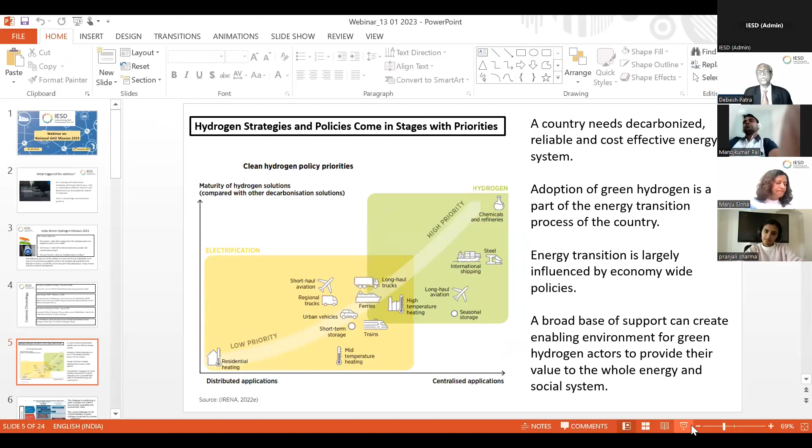Now, if we have to understand this mission, before that, let us understand some of the theoretical structure of this mission. First thing, a country needs a decarbonized, reliable, and cost-effective energy system. Now, adoption of green hydrogen is a part of the energy transition process of the country. And energy transition is largely influenced by economy-wide policies.

A broad base of support can create an enabling environment for green hydrogen actors to provide their value to the whole energy and social system. So in this transition process of green energy, there are areas of low priority, there are areas of high priority, and the square that comes on the right hand side on the top of this graph is all the areas of high priority, and that is addressed by hydrogen. And the sectors which are top priorities are the industries, chemicals and refineries, then steel, then international shipping, then long-haul aviation, and then comes long-haul trucks and high-temperature heating.

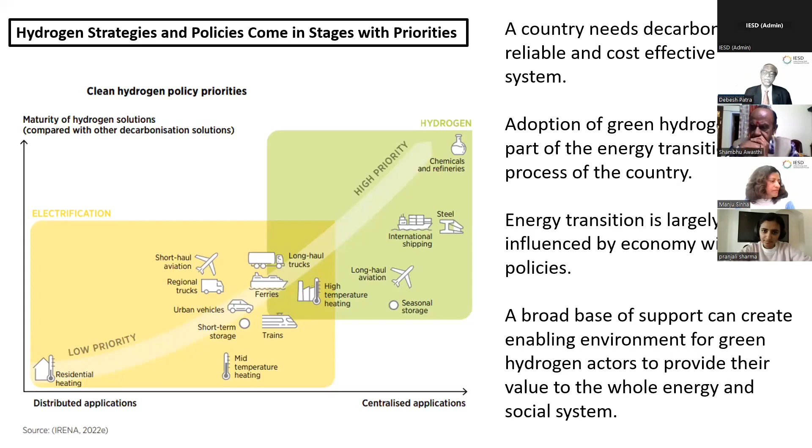Now, everything that we talk of energy, particularly the energy transition leading up to the adoption of hydrogen, is contingent upon some innovations. Innovation has to take place in the space of technology and then get translated into infrastructure. Innovation has to be there in market design and regulation. Innovation has to be there in system planning and operation. And innovation has to be there in business model. For example, in the space of technology innovation, there comes electrolyzer technology, hydrogen storage, digitalization for renewables, and hydrogen production forecast.

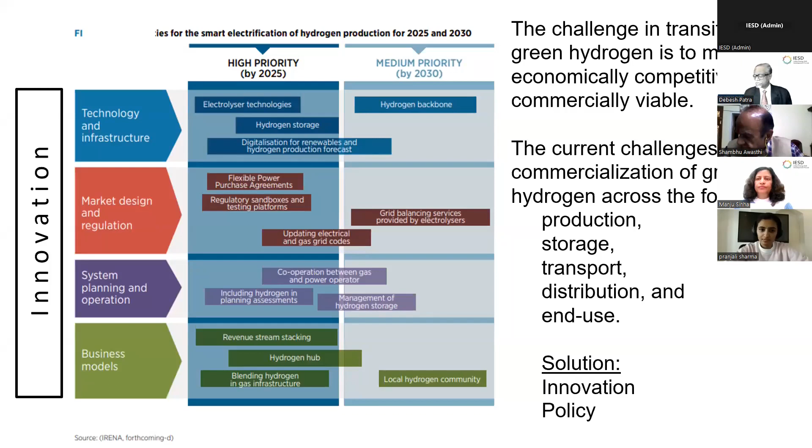And so on. Coming to market design, we have to have a flexible power purchase agreement, regulatory sandboxes and testing platforms, and then updating electrical and gas grid codes. And like that, it goes on. There are many areas where this innovation has to work. So the challenges are there across the value chain of hydrogen, that is production, storage, transport, distribution, and end-use application. And the solutions are primarily two. One is innovation, second is policy.

And so far, what has happened in India is that it is a part of the bigger energy transition picture. And the shift to hydrogen has to take place as a support to India's energy security. India is in the league of 30 countries in the world where hydrogen strategies have been outlined. And India has declared its ambition to become an exporter of hydrogen to countries like Japan, South Korea, and Europe. So overall, a competitive value space has been created in the manufacturing and commercial area for hydrogen, in which corporates, R&D setups, and foreign collaborations are vying with each other to step in.

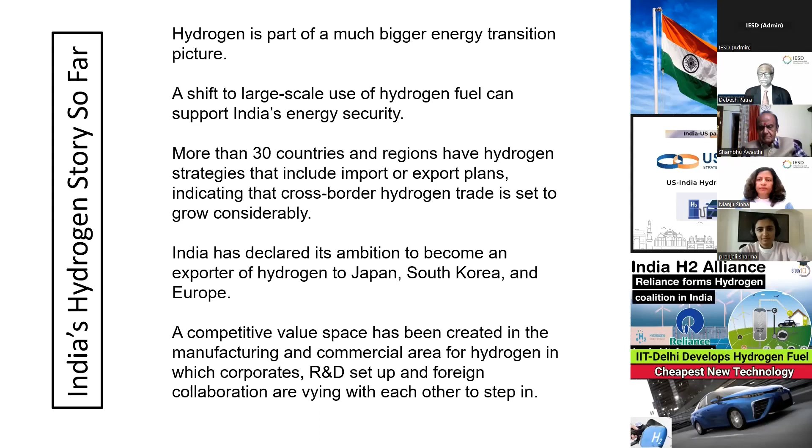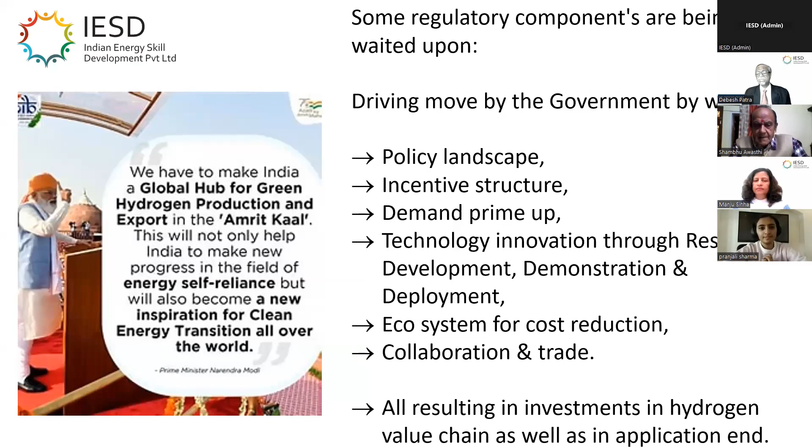But with this kind of status, as we find in India, certain things are being waited upon. For example, a policy landscape is being expected. An incentive structure is being expected. Demand priming by the government is being waited upon. Technology innovation through research, development, demonstration, and deployment, that the country is waiting for. And an ecosystem for cost reduction, the country is waiting for. And then the collaboration and the trade. So all these resulting in investments in the hydrogen value chain, as well as in application, this the country was waiting for. And when the country was waiting for all these, then came the National Green Hydrogen Mission 2023.

Then some pilot projects, particularly in the hard to abate industries like refining, steel, cement, shipping, and production pathways. There have been budgets of 1,466 crores. And then R&D will be done under the Strategic Hydrogen Innovation Partnership with a PPP model, and 400 crores have been allotted. And then some miscellaneous other components, 388. 19,744 crores of rupees have been allotted under this mission by the cabinet decision. Now, MNRE will formulate detailed guidelines for implementation of the respective components.

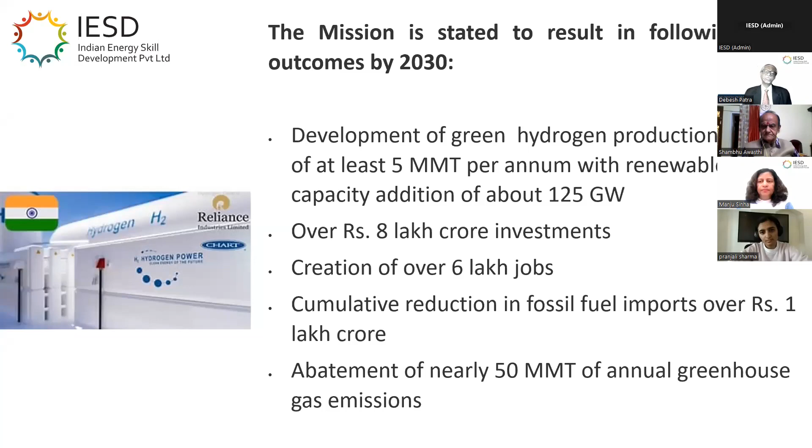And what is expected out of this mission is that 5 million metric ton of green hydrogen will be produced in association with the renewable energy capacity of 125 gigawatt. And then, as I said, 8 lakh crore rupees investment is likely to happen. 6 lakh jobs are likely to be created, and so much of fossil fuel import will be reduced, and so much of greenhouse gas emission will be reduced.

Now, some backup working also has been given, that this 5 million ton green hydrogen production would require 32 gigawatt of electrolyzer capacity, which will consume 115 million liter per day of water. And similarly, this also is contingent upon 90 gigawatt of solar, 38 gigawatt of wind power, and that will use 340,000 hectares of land. And then carbon dioxide emission reduction, and all the backup calculation.

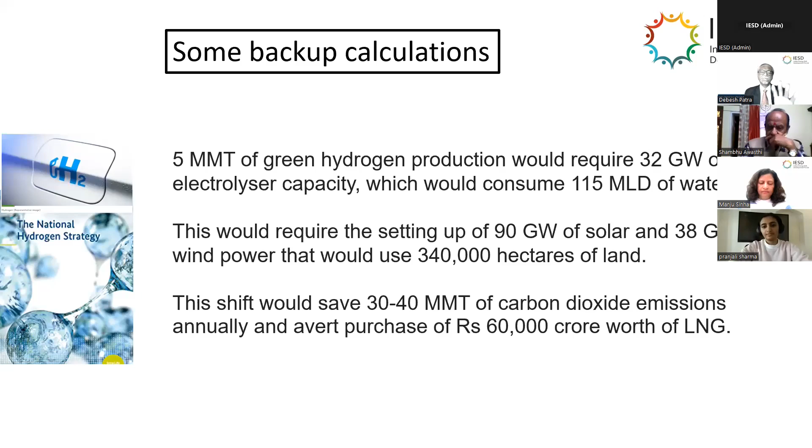Now, what is the way forward? Way forward is that an enabling policy environment framework will be developed to sustain the establishment of green hydrogen ecosystem. A robust standards and regulation framework will also be developed. A public-private partnership framework for strategic hydrogen innovation partnership will be facilitated under the mission. R&D projects will be goal-oriented, time-bound, and suitably scaled up to develop globally competitive technologies.

A coordinated skill development program will also be undertaken under the mission, and mandatory green hydrogen consumption would perhaps be set for fertilizer units, petroleum refineries, and city gas distribution network. Now, the significance of these things is that the future outcome of this mission relies a lot on crafting of these details and guiding the ecosystem as it unfolds.

And all ministries, departments, state governments, etc. will coordinate under the overall nodal agency, that is Ministry of New and Renewable Energy, MNRE. And there is a governance structure which is there in the part of the report.

Now, specific actions that are likely to follow: in the next 3 to 4 months, government may invite competitive bids for subsidies, and bids will be invited for setting up of 2 green hydrogen manufacturing and utilization hubs, that is fertilizer and steel plants, and factories for making electrolyzers.

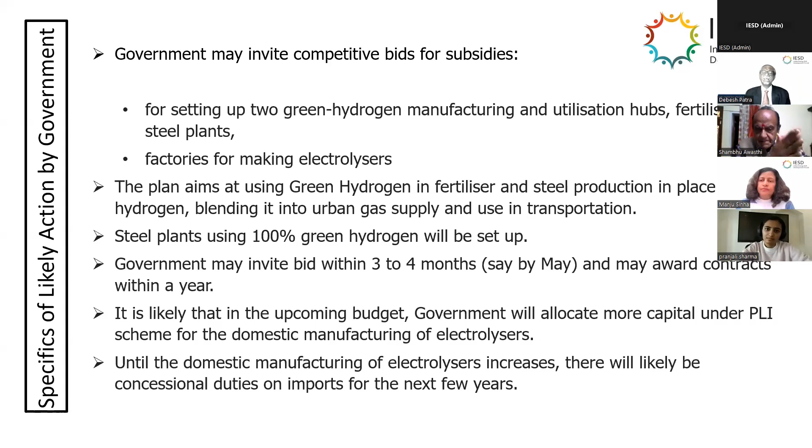It is likely that in the upcoming budget, government will allocate more capital under PLI scheme for domestic manufacturing of electrolyzers. And until electrolyzers are produced in large scale, there may be concessional duties on import for the next few years, and there could be a total waiver of duty on electrolyzers.

Yeah. Good afternoon to everyone. Sources and mechanism of hydrogen production, renewables, water, and application of fuel cells. These are the topics that I will cover in my speech. Next.

You know, there was a global investors meet at Indore on 11th. It was inaugurated by our Prime Minister. He especially mentioned and emphasized investment in green hydrogen. Next. This shows the importance, and as Dr. Patra has already presented, there is tremendous scope in all the fields, whether it is consultancy or skill development or some sort of training or awareness program and operation, maintenance, installation, whatever you think of, there is a tremendous scope.

Now, before going further, there are some points I would like to caution: hydrogen is well established as far as the industries are concerned, but now it is going in the public domain. So awareness is of great importance. Then leakage is a critical issue because it is colorless, odorless. So you cannot see, you cannot realize that it is leaking. So that is a challenge. It is the lightest, so it moves up. This is a plus point. It moves up in the atmosphere. So if it is an enclosed system, we may put some sort of detector at the top to detect it.

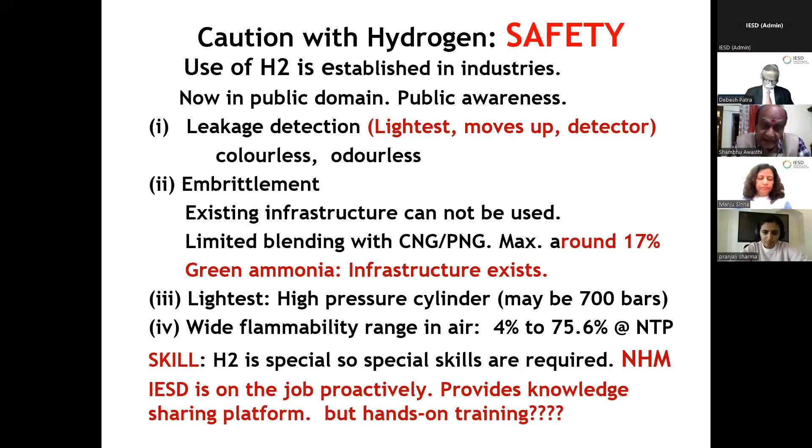And till infrastructure gets developed for hydrogen, there is an option that we may take the route of green ammonia. Green ammonia is important. It is part of the policy also, which was issued in February.

Now I come to sources. We are all aware of these sources: fossil fuel, coal, crude oil, renewables, biomass, and of course nuclear. These are the main. Next. This production mechanism, I have just listed here, but better we go to the next slide. From there I will start explaining.

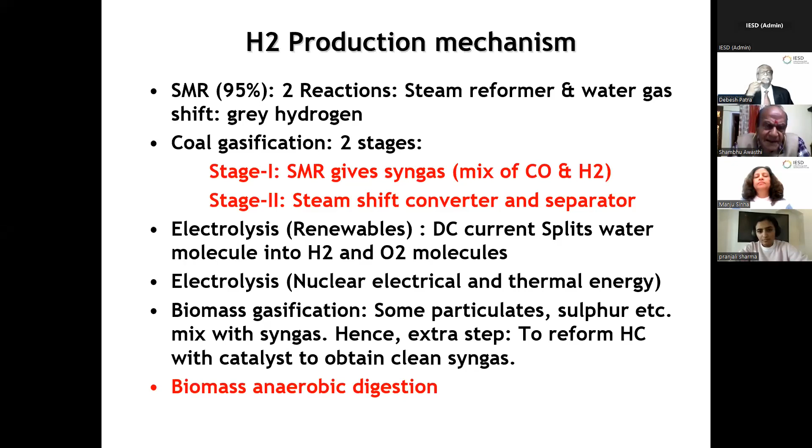So next, please. Yes. Now, steam methane reformation process: almost 95 or even 96% globally follow it. This is the method of producing at present. It is in two stages. First stage is the reformer reaction. Here, methane, CH4, and water, generally in the form of steam, go in and produce a syngas. Syngas is a mixture of carbon monoxide, CO, and hydrogen.

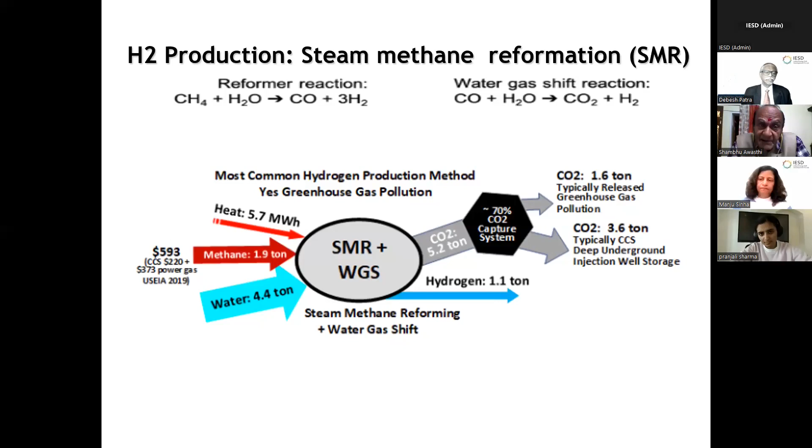And in the next stage, we have to segregate them. So again, there is CO. We again induct some steam, water, so that CO is converted into CO2, and hydrogen is segregated out. This is the most commonly adopted everywhere throughout the world. Next. This coal gas, no, previous.

Coal gasification. In coal gasification, pulverized coal is used, which reacts with an oxidant, maybe oxygen or some steam. And coal is converted into a very hot syngas. Syngas is again a mixture of mainly CO and hydrogen and CO2 and something else also. So again, the same process goes on, and syngas goes through the shift converter reactor. It has to be purified, and all impurities are to be removed.

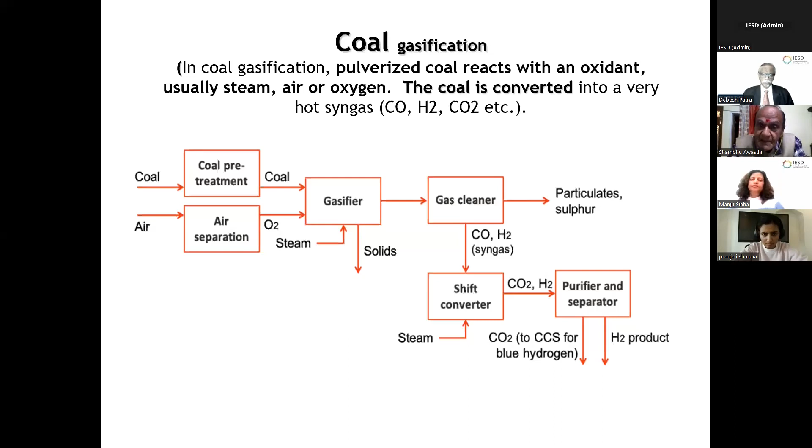And if we make the provision of carbon capture also, then the hydrogen that we get is designated as blue hydrogen. Next. Biomass. We know biomass, what these are. So next, I will explain.

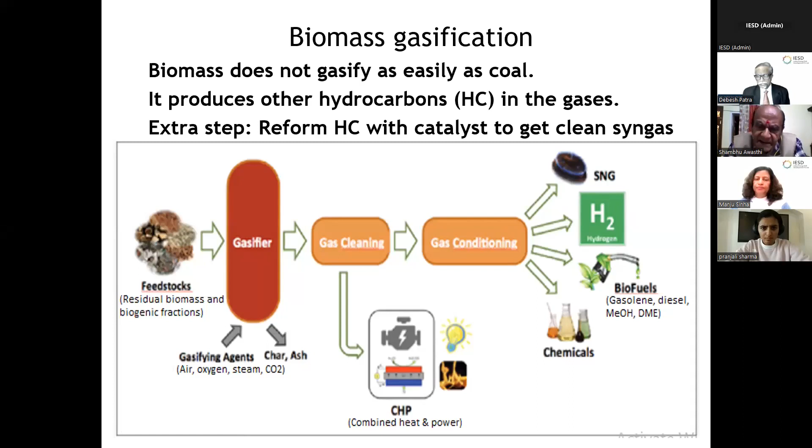Biomass gasification. Gasification method, we have just discussed coal gasification. It is similar, but when we get the syngas, it contains a lot of hydrocarbon gases, impurities, and some particulate matter also. So there is one additional step as far as biomass gasification is concerned. The extra step is that we reform hydrocarbons with a catalyst to get clean syngas. And once syngas is available, then naturally CO2 has to be segregated or removed, and hydrogen we can get. That's all. This is the process. Next.

At the same time, it can be used for soil conditioning also. This biomass is very important in the Indian context, because the Indian economy is dominated by the agriculture sector. Okay, next please.

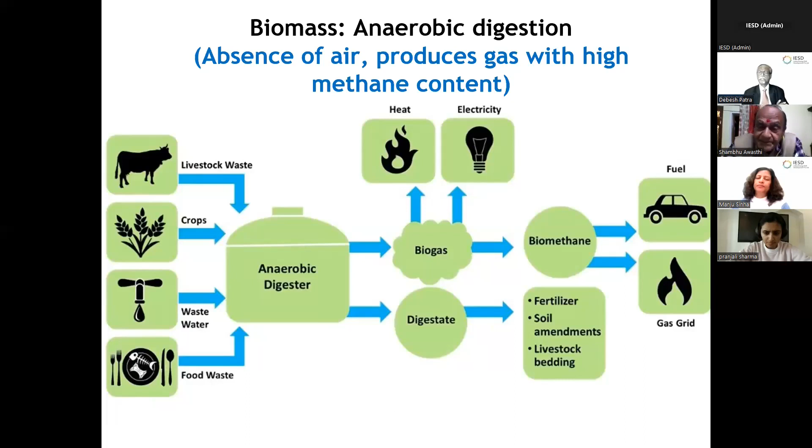I would like to mention the main problem with biogas, biomass waste conversions and all that. These processes are very slow. We need large-scale production of hydrogen and green hydrogen, in huge quantity and at a fast rate. So a lot of research is going on in various institutions.

But I would like to mention that in the USA, they have used organic waste and a closed-loop, carbon-negative pyrolysis process. And they've already demonstrated this project by operating it for 1 year. It is in California. So this is an encouraging development. And they claim it is very, very pure hydrogen they are getting from it. Anyway, next.

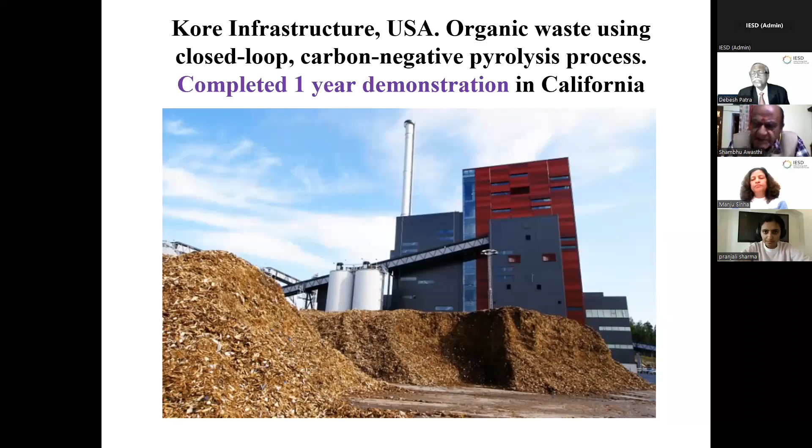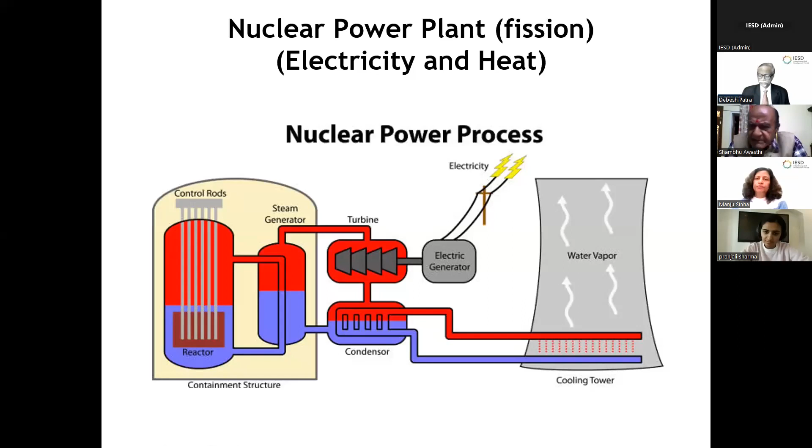Nuclear plant, we know. Along with thermal, they basically take care of the base load in our system. So we get energy in two forms: one is electricity, and another one is heat. These two forms are available. And next, these two forms of energy.

Hello? So we can hear you. Please continue.

So this is used for electrolysis. Now there are three options. If we use only electrical power, then what we get is pink hydrogen. If we use only heat, high-temperature electrolysis, then it is red hydrogen. And when it is a mix of these two energies, we call it purple hydrogen. Next.

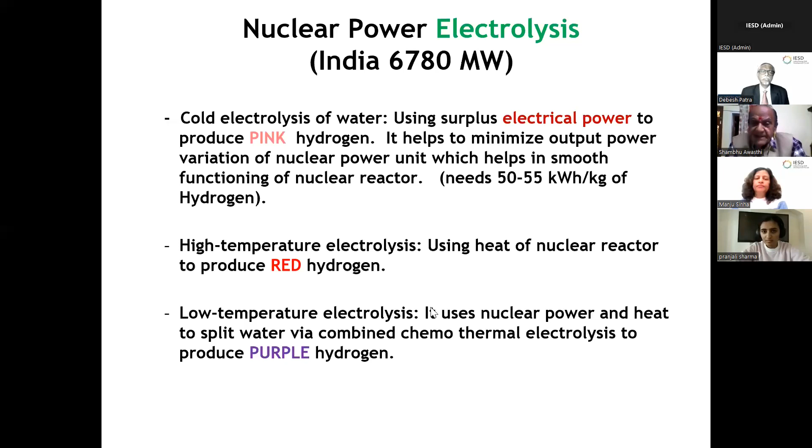Renewables we know, and as Dr. Patra has mentioned, 125 gigawatts are to be added by 2030. So solar, wind and hydro are very important. I would like to share my view that everywhere we find people mentioning, in documents and papers, solar and wind. But hydro is not less important. It is very, very important.

It forms a part of water management. That is one thing. And now floating systems are coming up very fast. And for hydrogen, what are the inputs required? Let us see. Inputs required are electricity and water. And when it is a solar PV system in a floating mode, we get a unique advantage. Both the inputs are available then and there.

Another advantage: these water bodies are very large, and if you spread these floating systems over them, evaporation losses are also reduced substantially. That is another great advantage. Anyway, next.

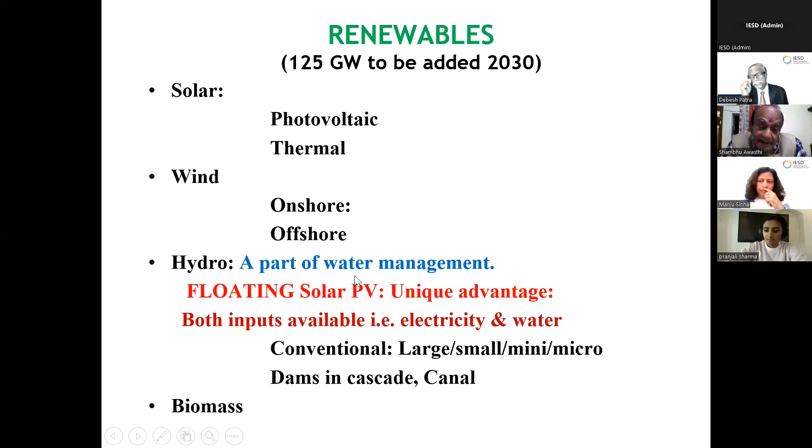You will be pleased to know that the biggest floating solar PV system is coming up and is expected this year. It is in Omkareshwar, Madhya Pradesh. There is already a hydropower project, 8 into 65 megawatts, about 600 megawatts. It is coming on the Narmada River with an investment of 3,000 crore rupees, and it will occupy an area of 100 square kilometers. Next.

Offshore, we do not have even a single turbine operational as of date. And there seems to be great potential in the context of hydrogen also. Here I would like to mention that Reliance is taking the initiative. To gain some experience, to start with, they will go with a 5 megawatt wind turbine installed in the sea waters of Gujarat. A pact has been signed with Stiesdal, Denmark, for technology development and hydrogen electrolyzer manufacturing. This is a very important, great initiative. Next.

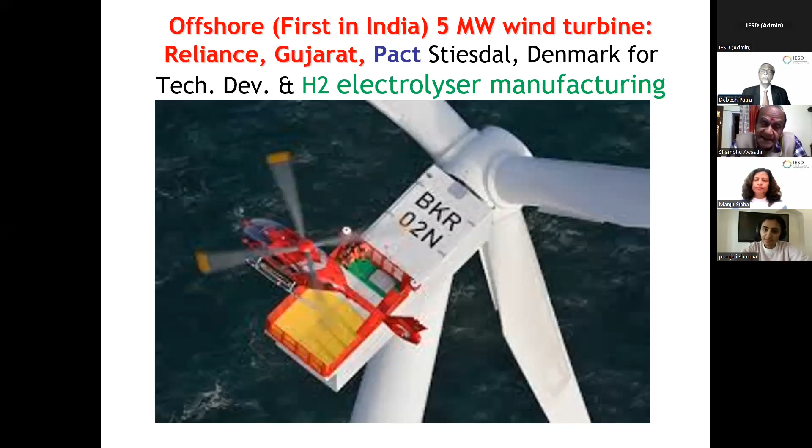In the context of electrolyzers, people always talk about the electrolyzer only, but what about BOP? Many things are involved. Water has to be demineralized, then collection, purification, drying, compression of hydrogen, and so on. And if you are drawing power from the utility grid, you need transformers, rectifiers, control systems. All these things we are competent enough to design and manufacture, so there is no problem in these BOP areas.

But the electrolyzer has to be state of the art, and we have to go in a big way. That's why there is maximum emphasis on manufacturing electrolyzers indigenously. And of course, oxygen is the byproduct of the electrolysis process, so a huge amount of oxygen is available. This can be sold and utilized, and it can improve the economic viability of the hydrogen production project. Next.

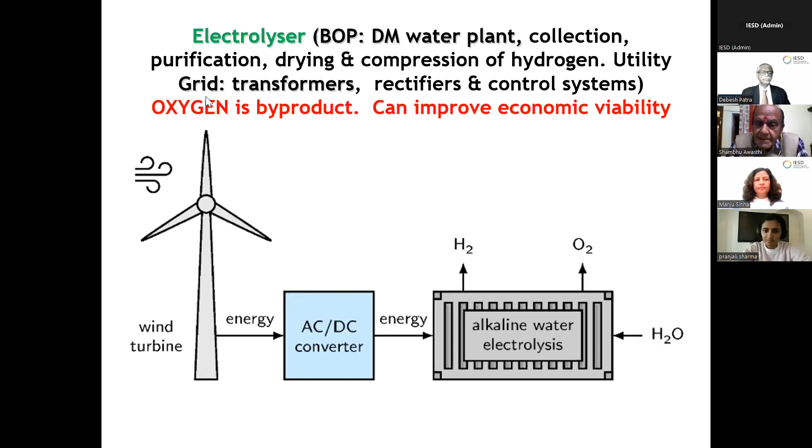Water, as I mentioned, about 10 liters per kg is required. There are many sources: reservoirs and dams, most of which are irrigation dams. Also, during Azadi Ka Amrit Mahotsav, Amrit Sarovars are being built around the country, and every district has to build some 75 Amrit Sarovars. Similar sarovars could be developed dedicated to hydrogen production.

And Dr. Rajendra Singh, known as the Waterman of India, has revived so many rivers and tanks, basically in Rajasthan. So all these resources can be used, whichever suits the location. And for seawater, it is great news that IIT Madras has developed technology for using seawater for electrolysis. This research is a landmark. Next.

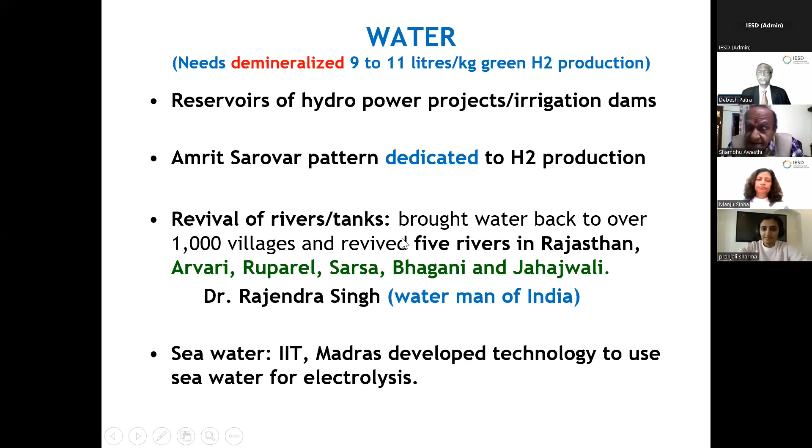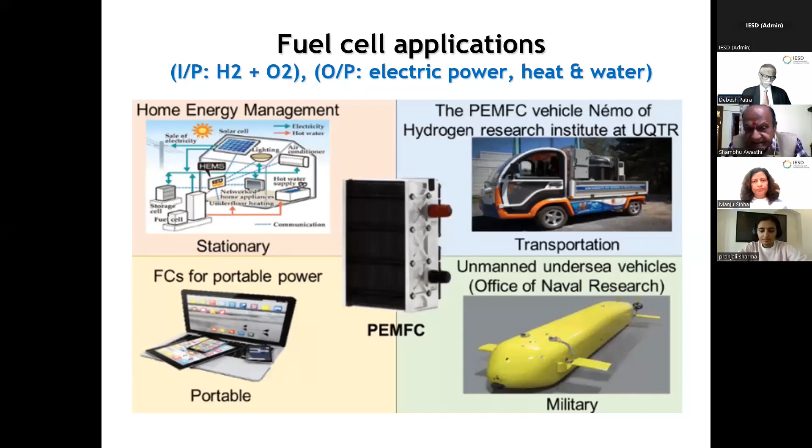You just see the energy conversion chain. You are starting from the electrical energy. We are seeing the wind turbine, going for electrolysis, compression, storage, and then again feeding to the fuel cell in this transport vehicle. And the fuel cell is giving electricity to drive the electric motor. So this is the energy conversion chain.

There are so many benefits of fuel cells: zero emissions, efficient, quiet, and long distances with fast refueling. They are the great advantages compared to battery and other systems.

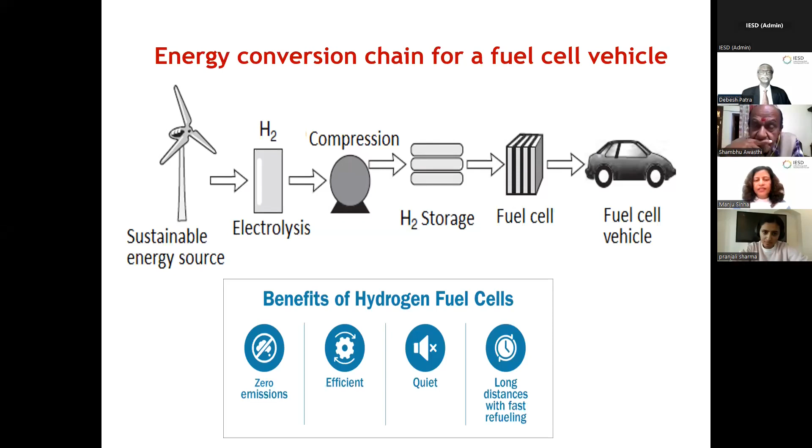Next. So can we finish in the next 2 minutes, please? Yeah. There are two other speakers. Next.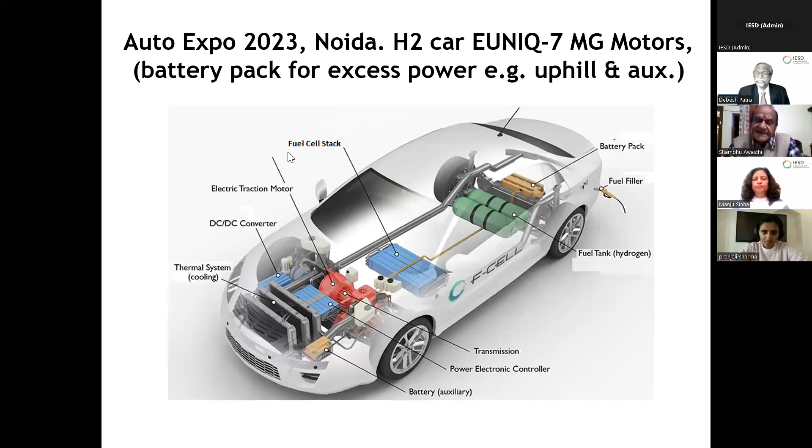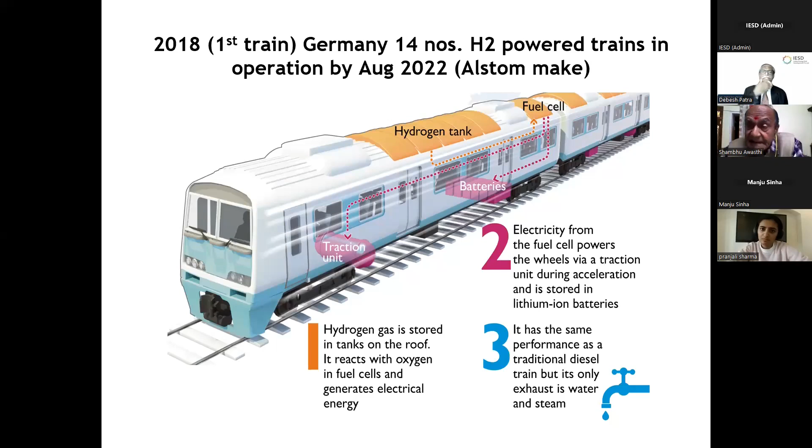This is the train in Germany, 2018. This was the first train, and now they are operating 14 hydrogen trains. And here please note that the hydrogen tank is at the top roof, so that in case of any leakage, the hydrogen goes up in the air. Next.

In India, there are eight heritage trains and routes. All these train routes will be converted to hydrogen within 2 years. And another is Vande Metro. The first train will be starting this year only. And then we will join another 3 countries, Germany, China, France. India will become the 4th such country to have such indigenous development. Next.

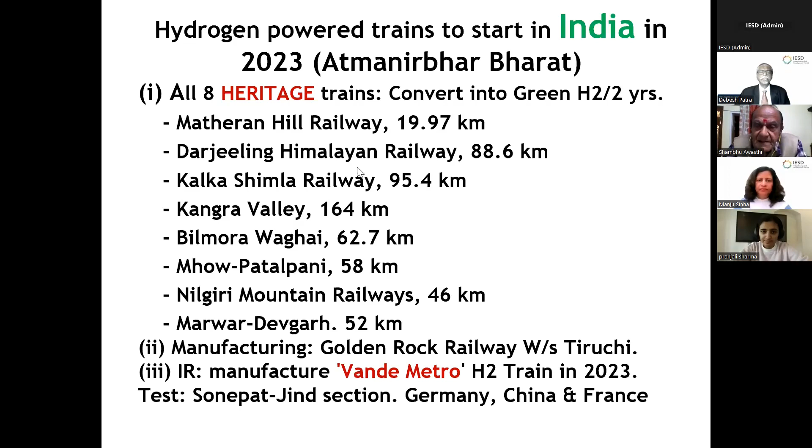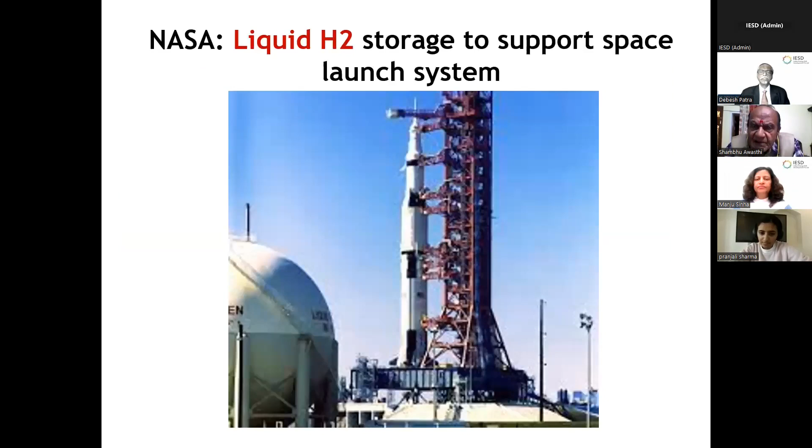So next. Here please notice that the world's largest one is a 78 megawatt power plant in Korea, and they are using phosphoric acid fuel cell.

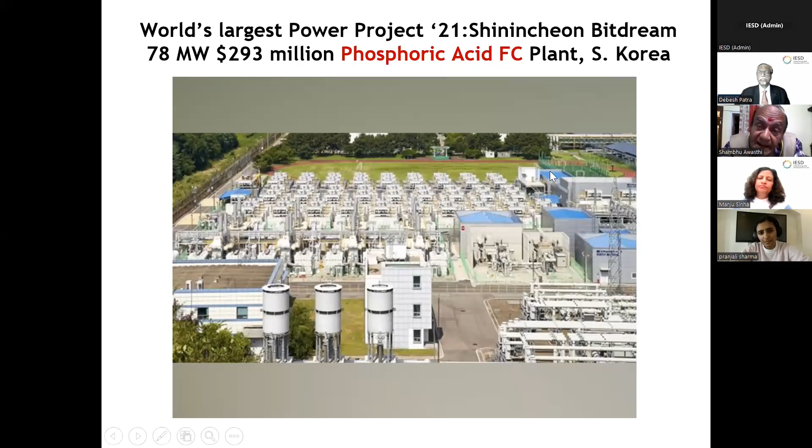Next. In India, the first 10 kg, we are all aware, at Jorhat pump station, Assam, Oil India has installed this one. This is a pure hydrogen pilot plant. It was commissioned in 2022. It has 500 kilowatt solar PV and a 100 kilowatt anion exchange membrane electrolyzer. This is the first time in India this type of system is used. Next.

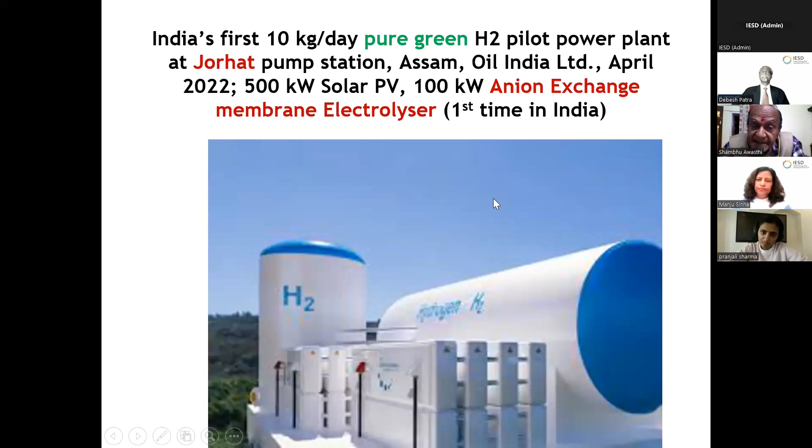NTPC Simhadri. They have something very unique: a totally microgrid-connected standalone pilot plant with 25 megawatt of floating solar PV and high pressure storage. Solid oxide electrolyzers and fuel cells have been used. It is a complete system.

So they will produce hydrogen and store it. High pressure storage is also there, and there will not be any grid supply. They will supply power to their guest house by converting through the fuel cell, and they will gain this experience for some time. It is a sort of pilot project, and then they will go in a big way in this area.

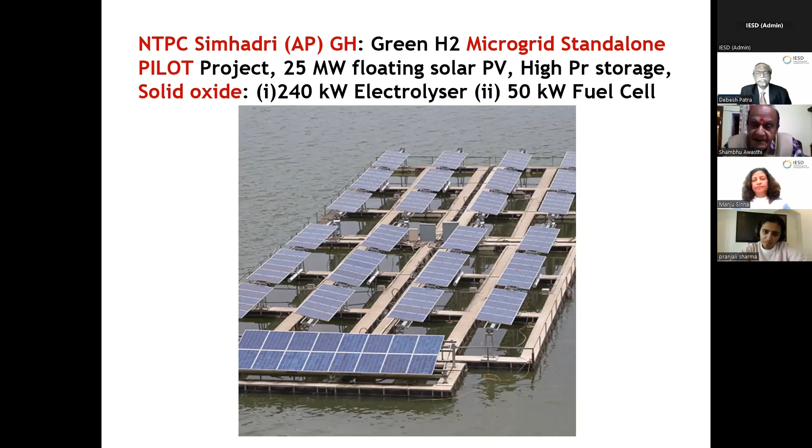Thank you, Awasthi sir. Now I will invite Ms. Pranjali to speak. Am I audible? Yeah, we can hear you.

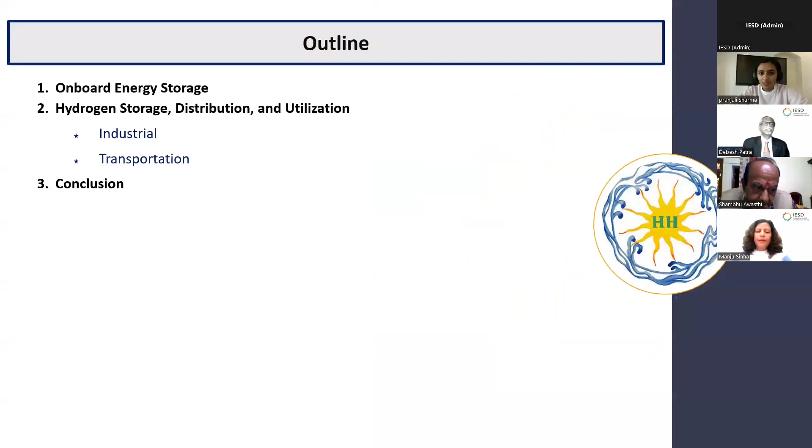As Dr. Awasthi has already discussed various ways in which hydrogen can be produced, I'll be talking about techniques by which it can be stored and distributed to the utilization sites. This is the outline of my presentation. We'll start with how to make India a global hub for producing and exporting green hydrogen. For this, we need low-cost systems for producing, distributing, and storing hydrogen. We also need utilization sites to have fuel cells which are low cost, have high lifetime, and high energy efficiencies.

We start with classifying the utilization sites into two broad categories. Industries require stationary storage, while the automobile sector requires mobile storage. For stationary storage, we mainly focus on gaining the required performance of the storage system at the least cost. But for the automobile sector, we have two major objectives, low cost and low weight, and both are to be achieved without compromising the safety of the vessel.

So for this, we start with developing the systems. The major technical challenges in developing the system are its design, manufacturing technique, and testing facility. The design mainly depends on the working pressure up to which the distribution or storage system has to be utilized. Based on that, material, geometry, working pressure, and all other properties are optimized.

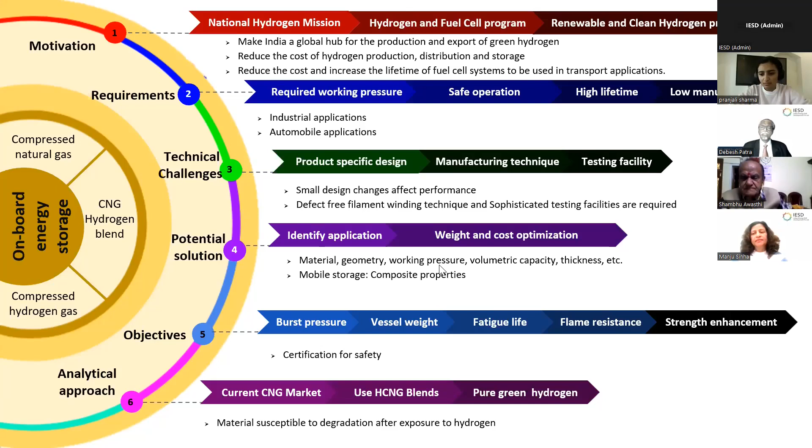Now we have different storage systems which are commonly used for storing hydrogen. Compressed gas being the most well-developed technique is adopted in the global markets. So the overall applications are classified into two broad categories. Industrials are suitable for stationary storage, while transportation is preferred with mobile storage efficiency.

So for industries, the ones highlighted in blue have large scale consumption of hydrogen. So in those cases, we simply deploy an electrolyzer on site. We produce hydrogen and this hydrogen is directly used in the plant itself. If the required pressure for hydrogen is higher, then we use compressors to bring hydrogen to this operating pressure, or else we directly use it for other applications.

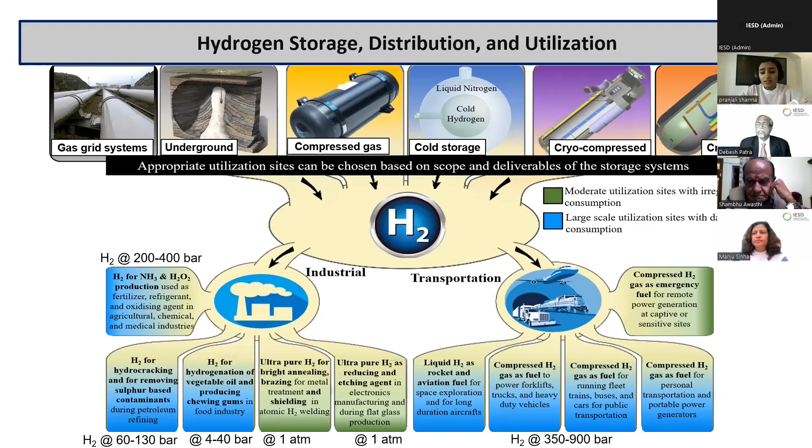In industries which require hydrogen at comparatively lower consumption rates, we can just add storage systems so that they can act as buffer solutions. As soon as they get finished, we can refill them whenever required. So this is the schematic as seen here. We have electrolyzer producing hydrogen at 30 to 40 bars. This hydrogen can directly be stored in a type 1 tank, or a compressor can be used to pressurize this hydrogen and store into buffer systems.

This is the multiple stack cylinder pack, which is being manufactured at our facility. In this, we can see many type 1 cylinders are stacked together. They are fixed with valves, and manifolds are placed onto it along with a home service line. So this entire system can act as a portable hydrogen dispensing station, and it's comparatively safer as compared to this direct tank, because this has more number of valves and PRD devices.

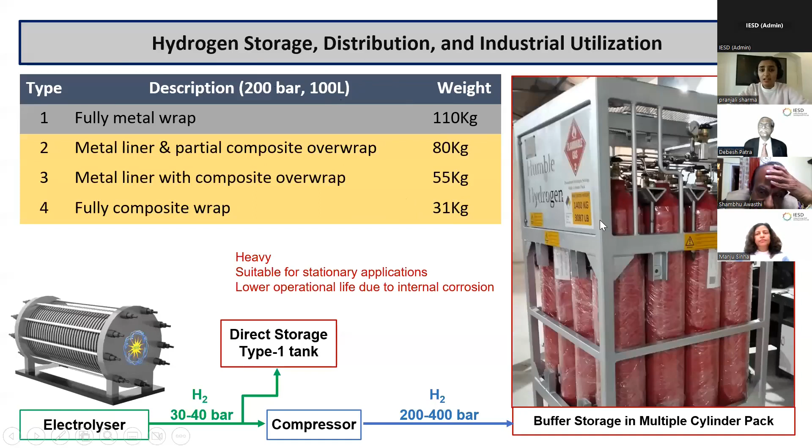Now, if we want to use the same system for mobile applications, we'll just have to replace these type 1 cylinders with type 4 cylinders. As seen, 110 kgs is the weight of a single cylinder for 200 bar pressure and 100 liters of volume. And for the same pressure and volume, the type 4 cylinder will only weigh 31 kgs. We can see this entire stack is around 1400 kgs in weight. If we go for type 4 cylinders, then this weight is significantly lower.

So therefore, we need to work on indigenously developing type 3, type 4 hydrogen tanks, so that we can further expand these hydrogen storage systems to the mobile sector. These are the various components involved for manufacturing type 3, type 4 tanks. Various phases of these are not yet available in India for indigenous production. For example, liners are to be imported. We don't get the adequate quality which we require here.

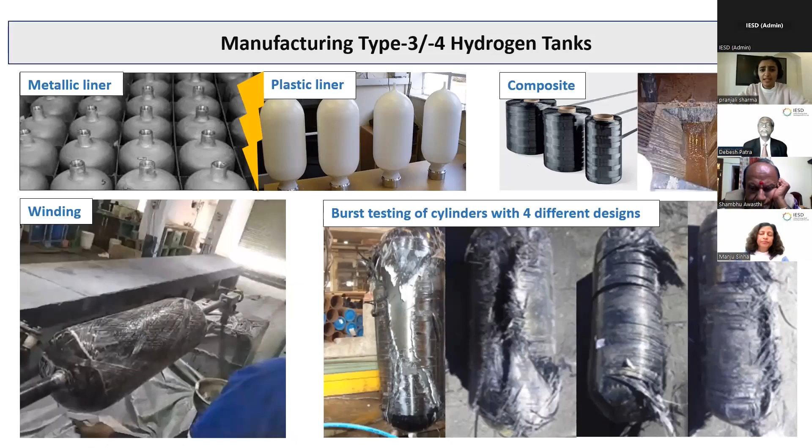Carbon fibers are not available in India, resins are well available, winding facilities are there, but then again, testing facilities are not well developed to test the cylinder as per all the tests which are mentioned for the cylinder certification.

Once we have indigenous facilities for developing type 3 and type 4 tanks, similar containers, as explained in the last slide, can be used by stacking various type 3, type 4 cylinders together in 10 feet, 20 feet, and 40 feet containers. We'll just add all these cylinders together with manifolds and valves so that they can act as portable dispensing stations. So for locations which are quite remote and don't require hydrogen dispensing so frequently, we can directly use them instead of implanting an entire dispensing station there.

These individual cylinders can also be used in these vehicles. For example, the cylinder with higher length can be used in trains, the shorter lengths perfectly fit in cars, and the ones which vertically fit in these containers fit in trucks and buses for heavy duty applications.

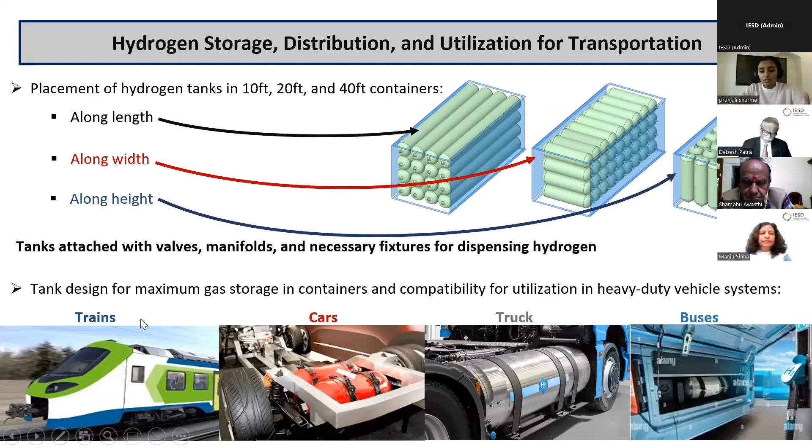So once we develop the technology for manufacturing these type 3, type 4 cylinders indigenously in India, then we can simply solve two major challenges. One is dispensing the hydrogen from the production site to the dispensing station, and the other one is for direct deployments in automobile industry. So this is the way forward for green hydrogen storage and distribution systems.

We just need to complete this entire roadmap, that is starting from hydrogen production systems up till the dispensing station. This requires development of pipelines, then the containers which will carry type 3, type 4 cylinders from one side to another. And the final bit would be the dispensing station for storing hydrogen and dispensing it into the automobiles which operate on hydrogen. This dispensing station also uses high pressure buffer storage systems, which are mainly comprised of type 4 and type 1 cylinders, all attached together using proper manifolds.

So this high pressure buffer system, it is really possible to make it indigenously in India right now. But this type 3, type 4 cylinder is something which we need to work on further. For this, we need indigenous facilities for manufacturing the liners, manufacturing technique for winding the composite cylinders, and also certified testing agency for ensuring the safety of the tanks for commercial deployments.

Once we achieve all these objectives, then developing low-cost, lightweight composite cylinders would really be easy. And thus, green hydrogen could really be utilized in the Indian market itself to fulfill all the energy demands.

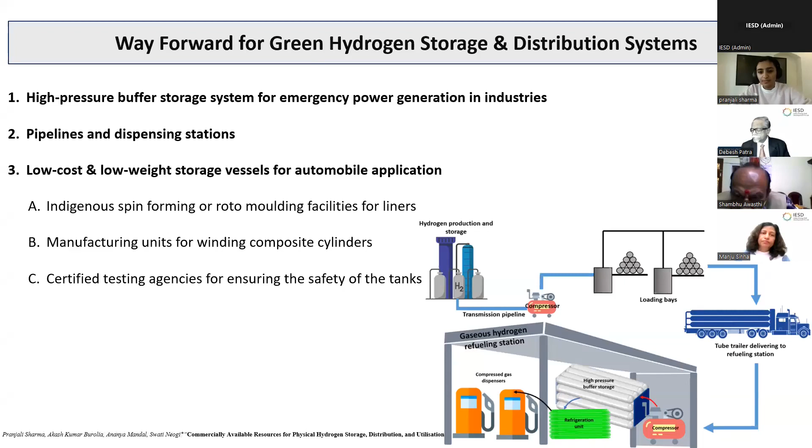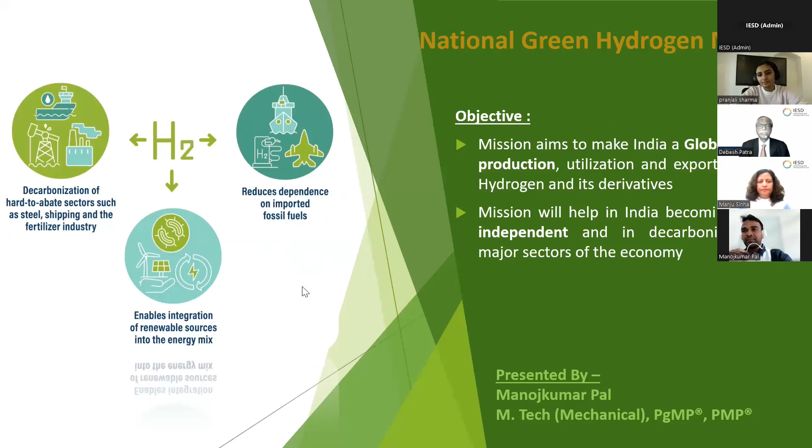That's all. Thank you. Thank you, Pranjali. Now I would invite Mr. Manoj Kumar Pal. Hello, good afternoon. Hello, my voice is audible? Yes, yes. Okay. So, yes, good afternoon to everyone. This is Manoj. Ma'am, already on National Green Hydrogen Mission, Mr. Patra has covered. So we'll go on third slide. This is fine. We are starting. Yes, we can go on next slide. The objective is already covered. Yes, ma'am. Next slide.

Okay, so already other three panelists have covered the technical aspects of hydrogen, as well as what is there in the National Green Hydrogen Mission. So what I'm going to cover now is where we are and what we wanted to achieve. And why hydrogen, first of all? The story started with the Conference of Parties 2015, when all the countries agreed to limit our temperature rise to 1.5 degree from the pre-industrial level.

And from that point, we started working on clean energies. And if we wanted to meet that 1.5 degree temperature rise, by 2050, hydrogen consumption in our overall energy mix should be at least 15%. But from 2015 to 2023, we have not done much. So right now we are lagging, and we need to do many more things to achieve this target. If I go by the DNV report, we are just at 0.5 percent of this 15 percent.

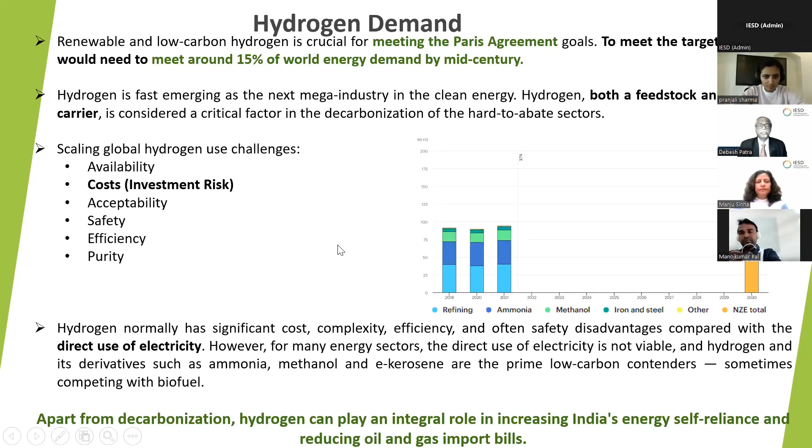This is already covered by Mr. Ravasti, so we'll go to the next slide.

Yes. So when we are going to produce green hydrogen, whatever renewable energy we manufacture for our own uses should not be bypassed or otherwise used for the generation of green hydrogen. Only if the surplus renewable energy is used will we call whatever hydrogen we produce green hydrogen.

Otherwise, instead of fulfilling our daily needs with renewable energy, we'll pass that to industries for the generation of green hydrogen, and on the other side we are going to use fossil fuel as a source to generate electricity. Ma'am, next slide.

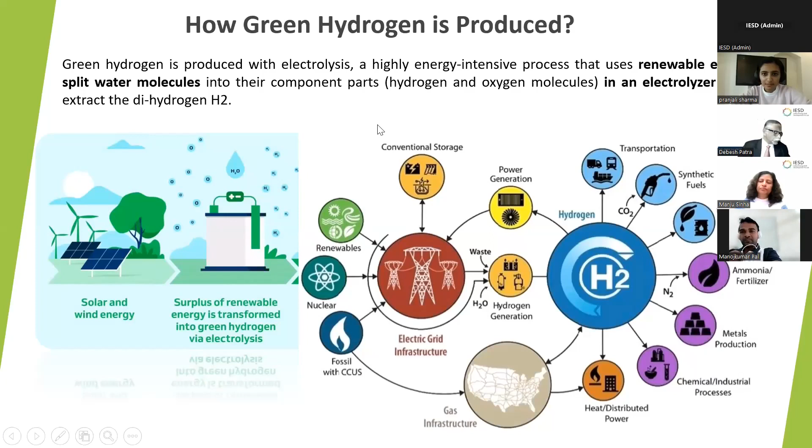So in terms of India, where we are right now: by the end of last year, the total installed capacity was 409 gigawatts, and out of those 409, 119 gigawatts was renewable energy. In the National Green Hydrogen Mission, India has committed to produce 125 gigawatts of renewable energy for green hydrogen. That means we need more than the renewable capacity we have today for the generation of green hydrogen.

And for that, the national electricity plan has already been drafted, but it is not issued. As per that plan, we need to generate 865 gigawatts of electricity by 2031-32. Earlier, till last year, India's mission was to generate 500 gigawatts by 2030. But now we are already late, so the plan was postponed by 2 years, to 2031-32.

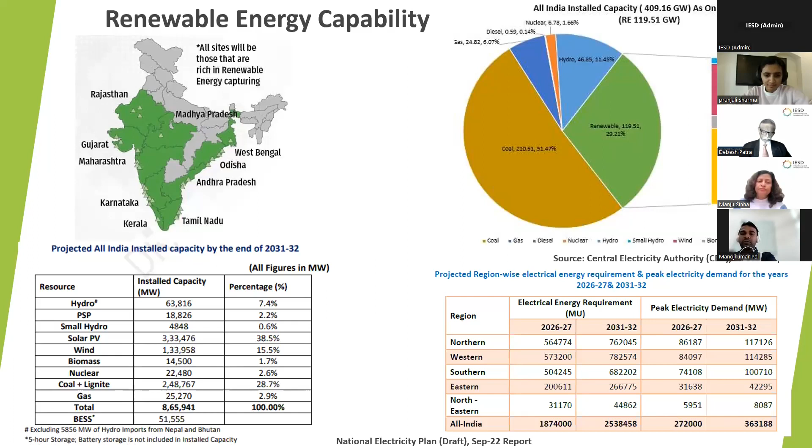Yes, ma'am. Next slide. So for renewable energy, in India we have already identified the locations, and if the problem is already known, anyone can work on it, and that's what the Government of India is doing. They have already identified locations and what renewable energy is required to generate green hydrogen, and we now have 8 years of timeline to produce 125 gigawatts.

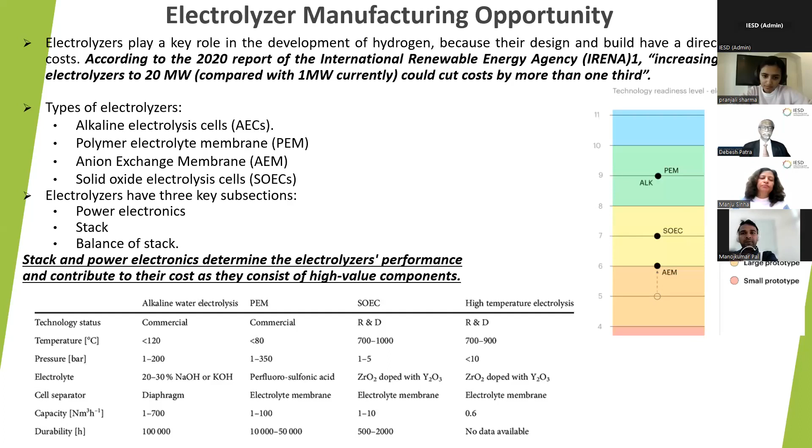Now, next is electrolyzers. There are many types of electrolyzers, but right now only alkaline electrolysis and polymer electrolyte membrane (PEM) are commercialized in the market. Ma'am, previous slide. Other electrolyzers like AEM and solid oxide: AEM is at prototype level; last year it passed from small prototype to large prototype, and SOEC is at demonstration level. So right now we only have alkaline and polymer electrolyte membrane electrolyzers available in the market to generate hydrogen. Yes, ma'am. Next slide.

So till now, the installed capacity of electrolyzers is 8 gigawatts, and we need to reach 700 gigawatts by 2030 to generate green hydrogen to meet net zero emissions, that is, to generate 175 metric tons of hydrogen. As per the projects in the pipeline or already completed, we will hardly achieve 240 gigawatts by 2030. So there is still a gap of 500 gigawatts, and that is the opportunity.

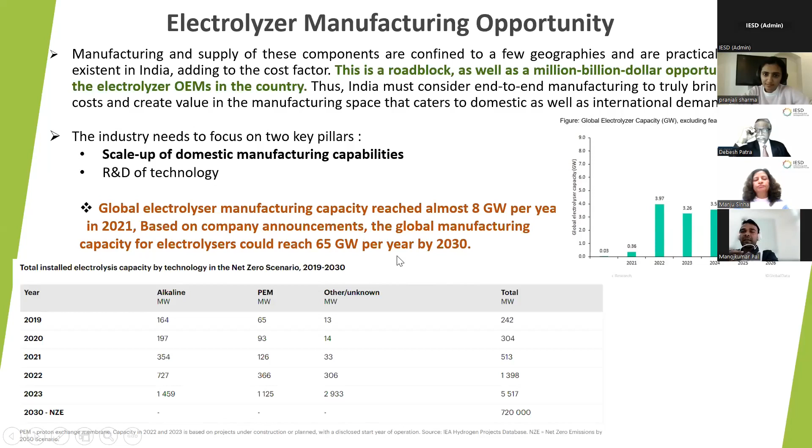Because when there are roadblocks, industries can generate opportunities by grabbing these and installing mega factories. Yes, ma'am. Next slide.

So if we go by the current capex and opex of these electrolyzers, capex is the cost of the electrolyzers, and opex is the electricity required from renewable energy. Right now, for proton exchange membrane and SOEC, more innovation and technology advancement is required to improve efficiency, reliability, as well as their cost. Yes, ma'am. Next slide.

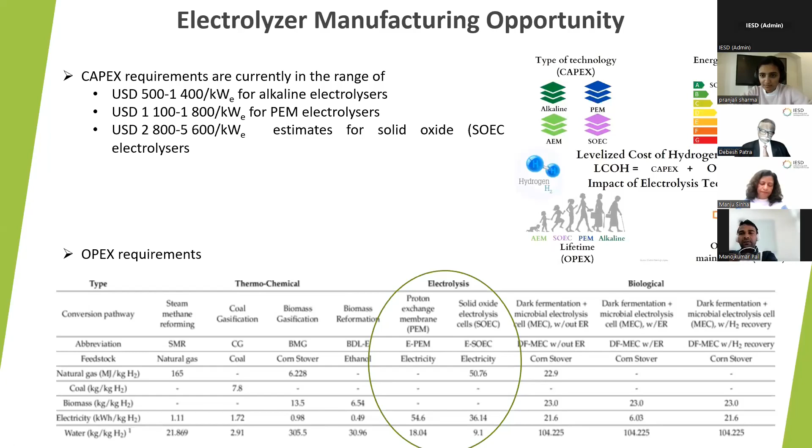Yes. So now that we have figured out the gaps in meeting our National Green Hydrogen Mission, we need to work, first of all, to produce renewable energy. Second is to work on electrolyzers, to install mega factories to produce electrolyzers. Going by the current demand, in India itself we have forecasted around 60 to 70 gigawatts of electrolyzers against the current installed 8 gigawatts.

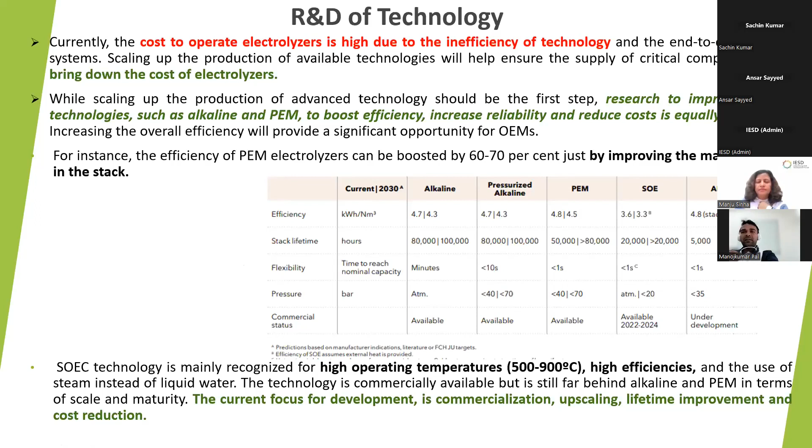Apart from India, many other countries are already working on their hydrogen missions, so in total we have a 700 gigawatt requirement. So we need to work on reducing the cost of these electrolyzers, increasing efficiency, and improving reliability. For that, the government has already identified some funds, but public-private partnerships still need to work together to improve equipment efficiency. Yes, ma'am. Next slide.

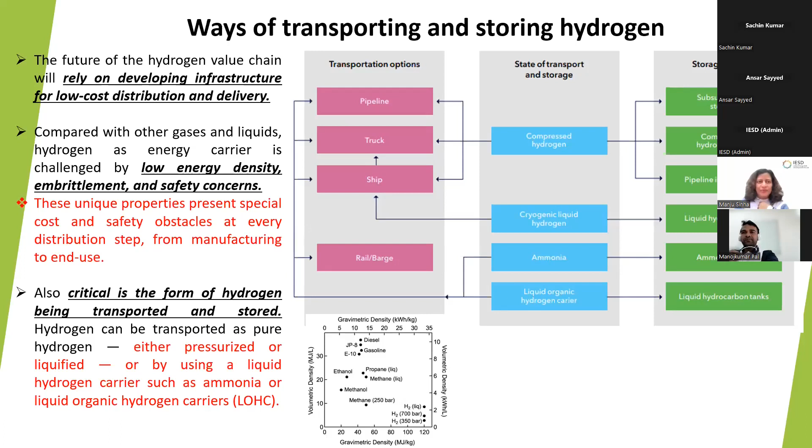Transportation and storage is already covered. Yes, ma'am. Next slide. Can we just finish in the next 2 minutes? Yes. Okay. Next slide, ma'am. It is already covered. So what is the way forward?

India has a huge opportunity to become the global hub for electrolyzers. Already the industries, all the OEMs, have started doing some R&D work, as mentioned by Mr. Avasti, some prototypes. Otherwise, they are purchasing individual small capacity electrolyzers from other countries and then trying to improvise by changing the materials, because the materials required for manufacturing these, like iridium and platinum, are not even available. So those material requirements need to be changed to improve the reliability.

If we see today, the cost of production of green hydrogen is around 4 to 5 USD per kg, and that is far above our target of 1 to 2. So by 2030 at least we have to reduce the cost by working on the renewable energy as well as the equipment, to bring it down at least to 2 USD per kg. Yes, ma'am. Thank you. Thank you, Mr. Manoj.